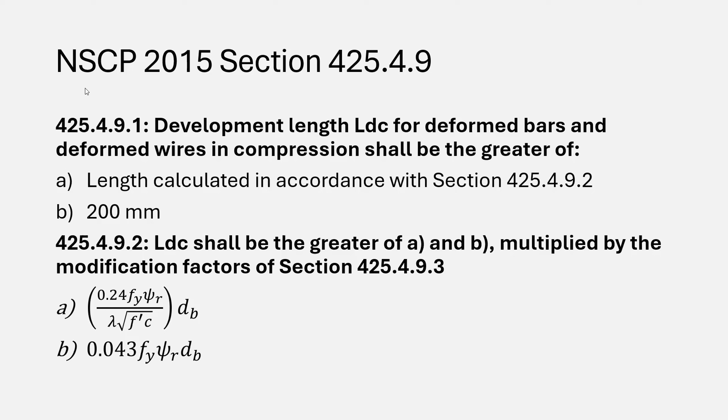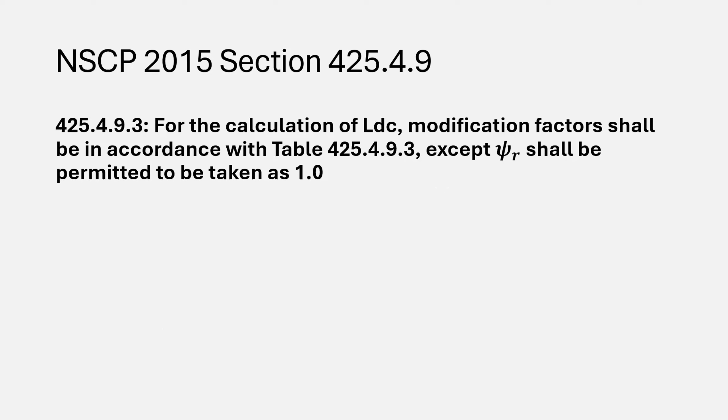So, letter A, that is 0.24 Fy psi r over lambda square root of Fc prime times db. Then, letter B, that is 0.043 Fy psi r db. Then, ayon sa section 425.4.9.3, for the calculation of LDC, modification factors shall be in accordance with table 425.4.9.3, except yung ating psi r shall be permitted to be taken as 1.0. So ito yung mga modification factor natin according to table 425.4.9.3.

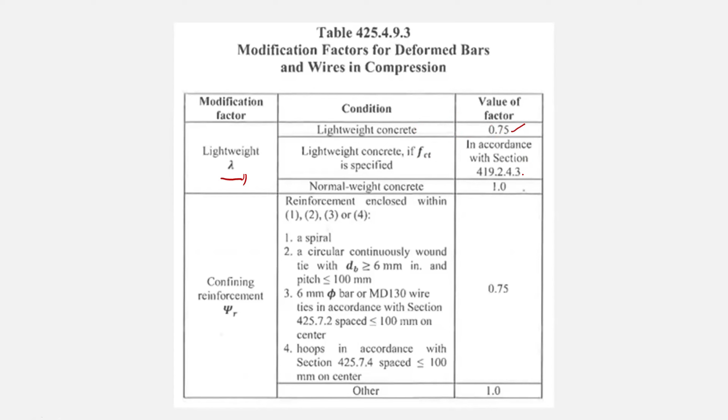Pagka lambda ang hinahanap natin, kapag lightweight concrete, ginagamit natin ay 0.75. But if yung concrete natin is lightweight and yung kanyang fct is specified, titingin tayo sa section 419.2.4.3. Then, for normal weight concrete, yung gamma ng concrete natin ay 23.5 kilonewton per cubic meter, or sometimes ginagamit nila ay 24 for the design ng ating structures. So, 1.0.

Then, para naman sa psi r, that is for the confining reinforcement, there are two criteria lang naman: either 0.75 or 1.0. Maraming cases for 0.75. Number one, kapag spiral column. Very simple. Number two, circular column, pero continuously wound tie ang gamit, ties na hindi spiral, with the diameter of the tie 6 mm and a pitch of less than or equal to 100 mm.

Number three, 6 mm diameter bar or MD130 wire ties in accordance with section 425.7.2 spaced less than or equal to 100 mm on center. So ito ay wire ties or 6 mm diameter bar as a confining reinforcement. And lastly, hoops in accordance with section 425.7.4, spaced less than or equal to 100 mm on center. In other cases, 1.0 na yung gagamitin natin.

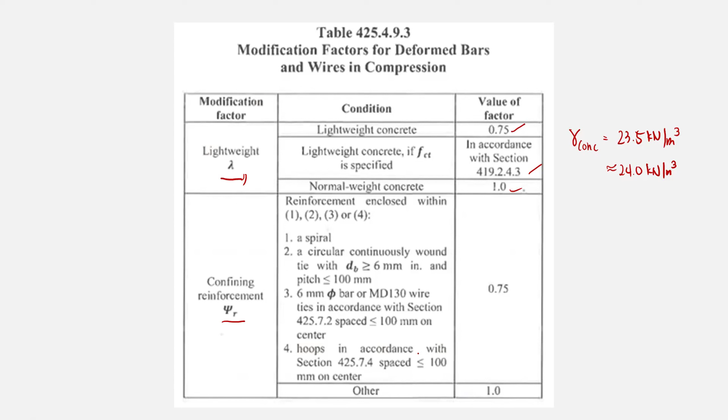So let's have an example problem. Determine the development length of 28 mm diameter compression bar of spiral column having Fy that is 415 megapascal embedded in concrete with Fc prime that is 24 megapascal. Assume normal weight concrete and use NSCP 2015 code for compression bars. So section 425.4.9, point 1, length calculated by section 425.4.9.2. So gagamitin natin yung dalawang formula, and check kung ano yung mag-govern.

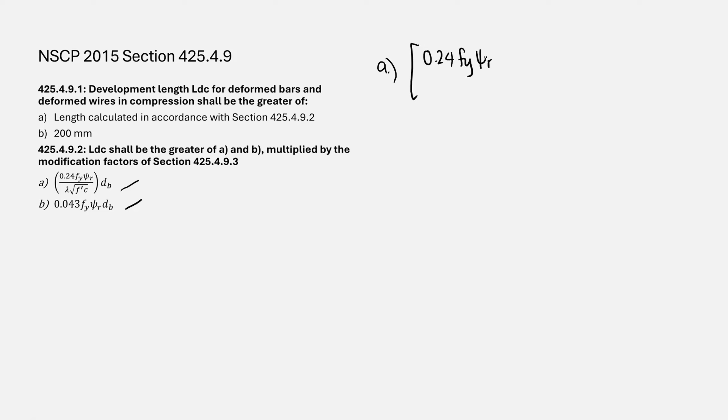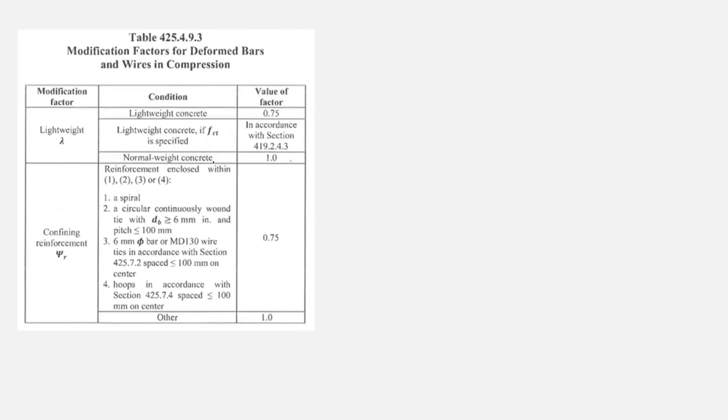Unang formula natin, 0.24 Fy psi r divided by lambda square root of Fc prime, multiply by db. But we don't have the value of psi r. Dito yan sa section 425.4.9.3. Puntahan natin yung table for psi r. Sabi natin yung column ay spiral. Number 1, spiral column. So automatically, psi r is 0.75.

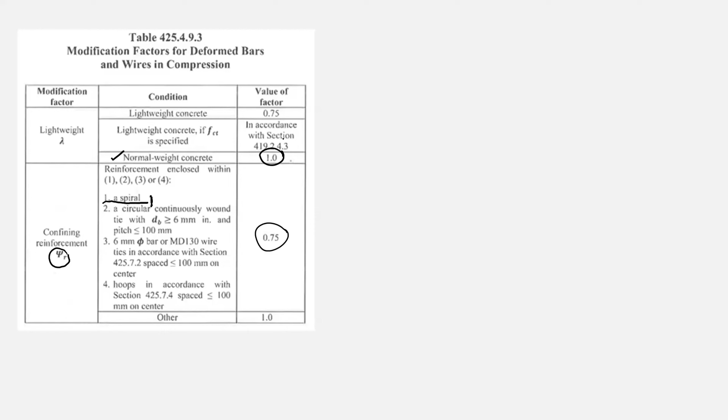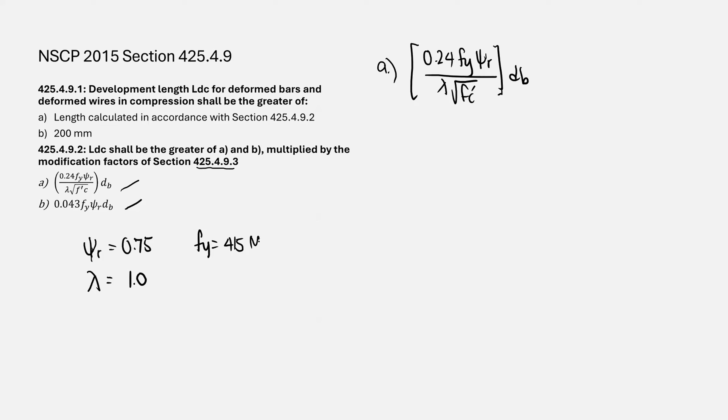Next, lambda, based from the weight of your concrete. Normal weight concrete, so 1.0. We have now the necessary values. Fy is 415 megapascal, Fc prime is 24 megapascal, and the diameter ng bar is 28 mm.

Substitute natin: 0.24 times Fy times psi r, 0.75, divided by lambda 1.0 times square root of 24, then times diameter ng bar. This is equivalent sa 426.946 mm. Next, letter B ng section 425.4.9.2, 0.043 Fy psi r db: 0.043 times 415 times 0.75 times 28. Therefore, 374.745 mm. Yung greater sa dalawa ang mag-govern.

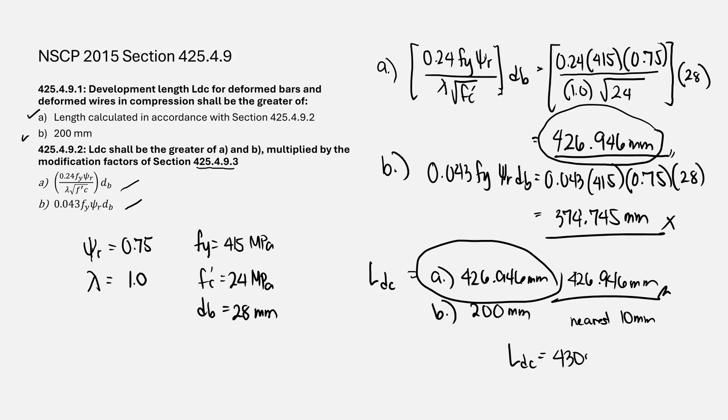Pero in practice, hindi natin ibibigay na 426.946. We need to round it off. Pag nag-round off sa development length, mas maganda mas mahaba, kasi that is the required length. Pag pinaikli mo, mababawasan yung requirement. So let's round it off to the nearest 10 mm. Therefore, Ldc natin na gagamitin ay 430 mm. So that is now the final answer.